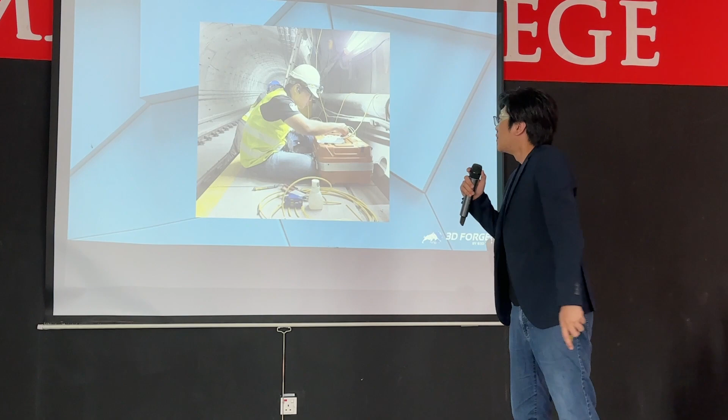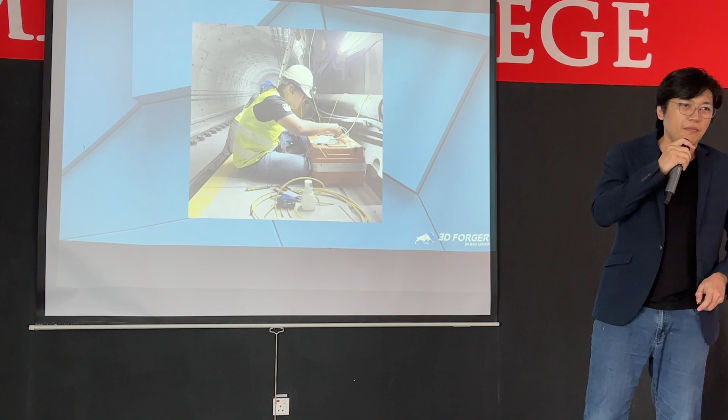So this is me, 10 years ago. I'm a specialist, have a very unique job, work inside a construction site. My job is doing installation of all the sensors to maintain structure health, to make sure the thing is not tilted, not over-vibrated by other construction sites nearby. It's a very unique job, supposed to be very bright in the future. But somehow, in the process of...

Developing the sensor stuff, I realized this is one of the things called Raspberry Pi. Anyone know this? Oh, you know this. So basically, it's an open source thing, a credit card size computer system. You can use it in a lot of places.

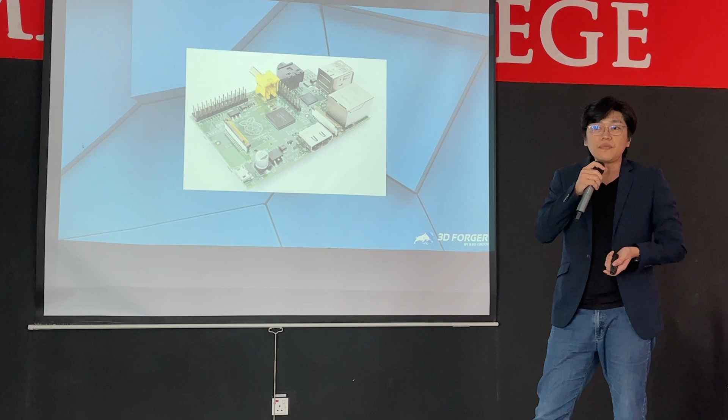One company in Taiwan, at the government level, actually used this inside the earthquake sensors. So they put it everywhere inside Taiwan, and I found this very interesting. They only sell it for $35, and it doesn't come with a case. It's a PCB, no one would think it's a finished product, but it is.

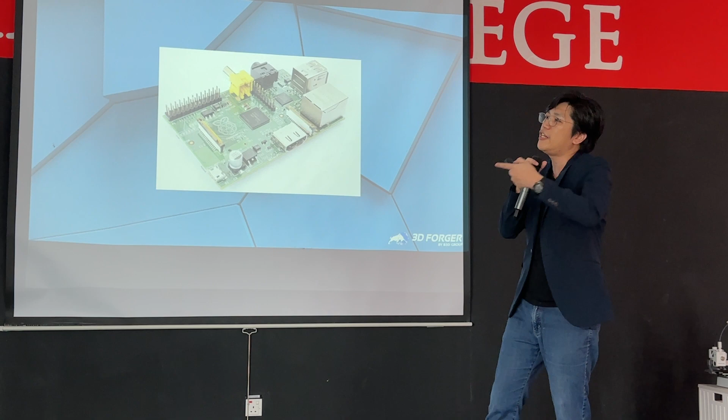So we wanted to convert it to be more finished, so when we use it on site, it's not that awkward. So I thought, okay, how do I make the case? I had a question mark, and I saw a picture like this - exactly the picture that people showed on the internet back 10 years ago. In European countries, they actually used 3D printing already.

So in the forum, someone sent me the digital files. They said, this is the STL file, you can ask any 3D printing service nearby to print it out. I was like, 10 years ago, I never heard about 3D printing - it was the first time I heard of that. So I walked around, searched the internet, and realized our Malaysia is very advanced, but I couldn't find anyone to provide this service to me. That was awesome, because that means I could make a very odd decision by making one myself.

So I decided to make something, a 3D printer, back 10 years ago. Because this thing is actually open source, we can learn it from the internet very easily. So I got this working, roughly spent a month's time after building and calibration to make it work. The story is very long for this building process, it's painful actually.

Because back then, when you DIY make a machine, it's always not working. But at the end, eventually I still made the casing, something like this. It is fun when I see these parts come out, because I've gone through so many failures. The process made me think about one thing, the spark.

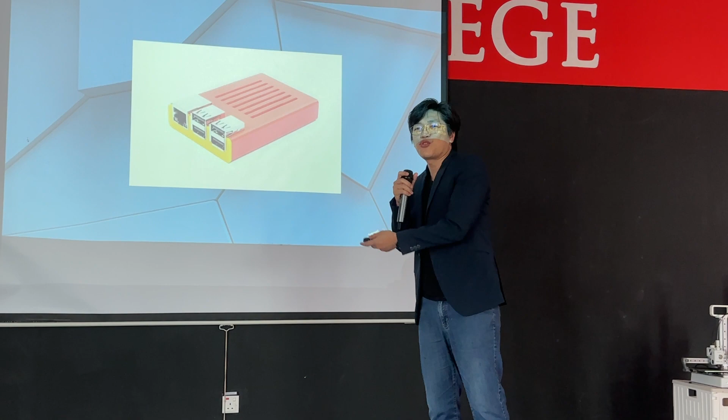For example, your chair you are sitting on, you can't digitalize it because you need to sit on it. You can't change your home sofa to digital. You can't change your water heater to digital. They always have physical products. And 3D printing is one of the ways to build the physical product.

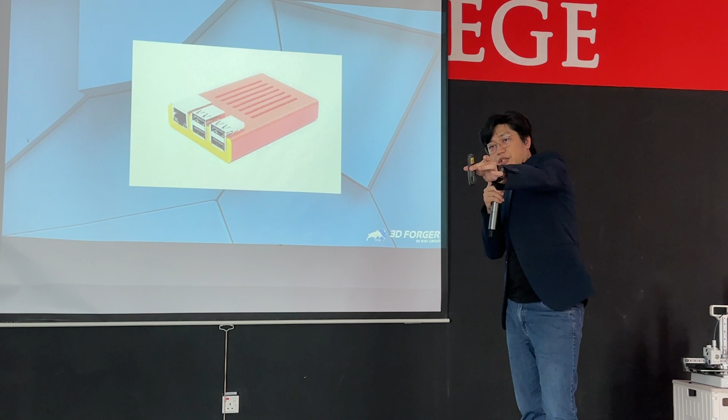That's why I think manufacturing is very complex, to build stuff and make it small, to become the part on your hand, even like this controller. They have definitely gone through the prototyping process, maybe some 3D printing steps that you may not realize, and then mass production - that's one of the ways to build the products.

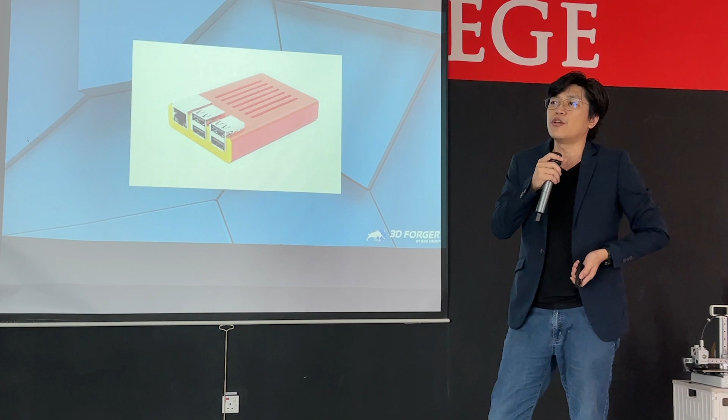So this empowered me as a solo player starting 10 years ago, and it enabled me to build something at home with just digital files. So I tried to understand how it works.

So I built a few more machines, I put stuff on the internet sharing about my process, and I'm very lucky that time - quite a number of people bought machines from me. But unfortunately, it didn't go through like what I was thinking. A lot of people who bought my first generation machine didn't end up using it well.

Because most of them felt like it's too complex to use. It's not like 2D printing, where you go through a few steps, press print and go. But not now - I'll share about the detail later. The market just reflected to me: Bruce, just print for me lah, don't send me all the parts, don't send me the machine, I don't know how to use it.

So finally I went through and started my 3D printing service. This is how it went on. So this is my first machine anyway, the first selling machine. I didn't have a brand at that time, it's called Homemade Delta 3D printer.

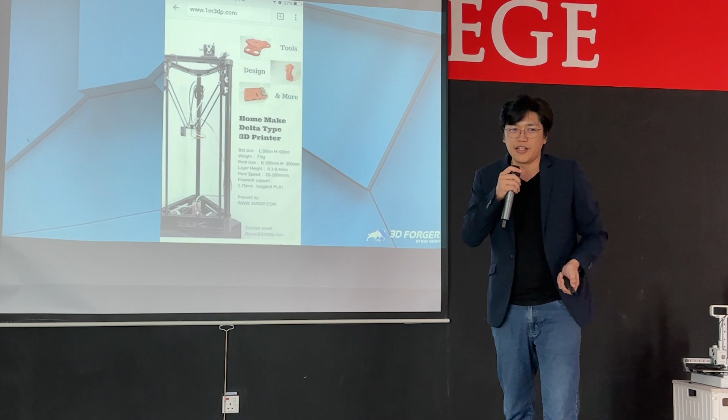Delta is a type of technology, just a little bit of history. Please ignore the website, it's already changed. And this isn't related to any other company, yeah?

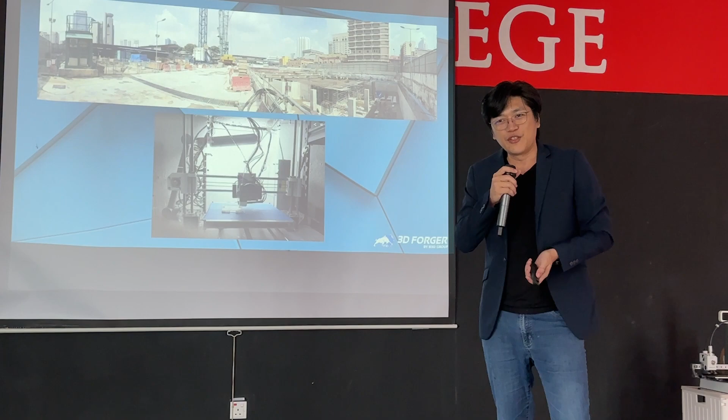So that time, after I changed myself to become a service provider, it's like daytime on the site, nighttime on the machine. Both in sequence, because in daytime I measure the physical, the big size building structure, and at nighttime I measure my machine structure. So it's still fun because it looks like it's doing the same thing but totally different.

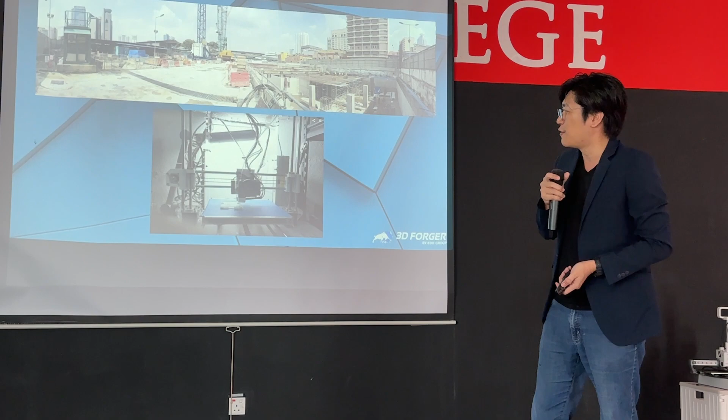And fast forward a few years later, I look back at all the projects I've done. There's casing, brackets, holders, basically all of them prototypes. And then you have tools and etc. All these images, every image I can tell a story.

One of this, like this one is KFC. You know why KFC got me to do some casing? It's not KFC who found me, but actually the payment gateway system found me. They needed to have some branding on it.

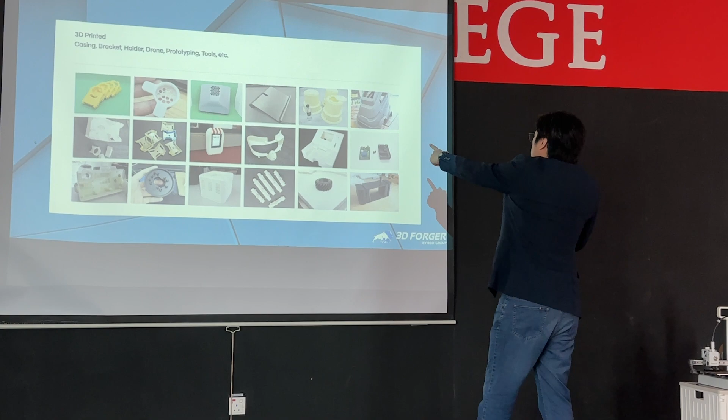Then robots - this robot is actually a very big size robot, 1.8 meters, and we put it in Singapore. They're using this for the case.

Many stuff, and not only engineering stuff, not only casing, we also went into marketing because why not? People just found me to build props, movie props, characters, sculptures, and sometimes a signboard, etc. Some of the images you may have seen before, or some of you may not, but I definitely got one of the pictures you may spot out later.

Other than marketing, we also go into professional markets, architecture, topography structures. This one is somehow linked to my background because I know the structure very well. And a lot more crazy after that, few years later, last 2 years we're going more extra.

We do record-breaking stuff, like football, the World Cup. If you realize, this is the World Cup trophy, but we're talking about 2 meters in base size. It's taller than me, and with the base it's actually 3 meters. We put it in front of Dataran Merdeka. This was actually a special request from the local government.

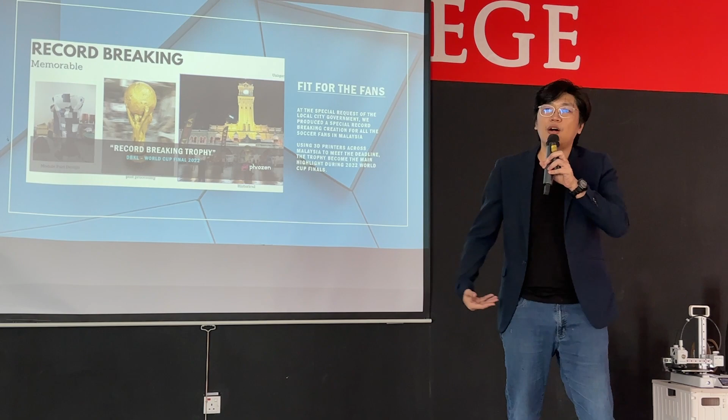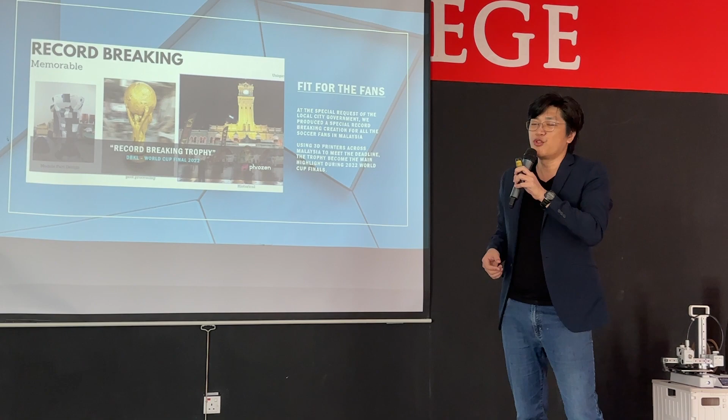We collaborated with 2 different associations. One is our association, called the Malaysia Additive Manufacturing Association, short for MAMA, and the other is the 3D Printing Association. Another one is the Food Truck Association, so they had a food truck event there. We did that for the fans.

Especially for this case, you'll see a lot of Lego stuff, very colorful. Why did that happen? Because in the last 2 years, we already have more than 1,000 hobbyists using 3D printing at home. The idea is, hey guys, how many of you have remaining materials at home? Help me print this part. So fans come together, everyone submits small parts, and at the end we assemble them like Legos, build it up.

This is how it works. Imagine on the spot, if everyone of you has a 3D printer, you can actually do something very big in a very short amount of time. You don't necessarily need a big factory to do it, just everyone contributing a little bit of power. This is what we call community power.

Funny event. We also do some premium surface finishing, not only printing. With printing you'll always see some layers in front, but we can do post-processing to make the surface look like this. This is one of the luxury brand projects from Japan.

Now it's inside TRX. If you walk by and see it, you can probably realize which brand it is, but I won't tell you now. It's combined with surface finishing, polishing, and final chroming of all the surfaces to achieve this look. It's not easy, not every 3D printer can do it, but we did, because we found that just 3D printing alone isn't fun enough.

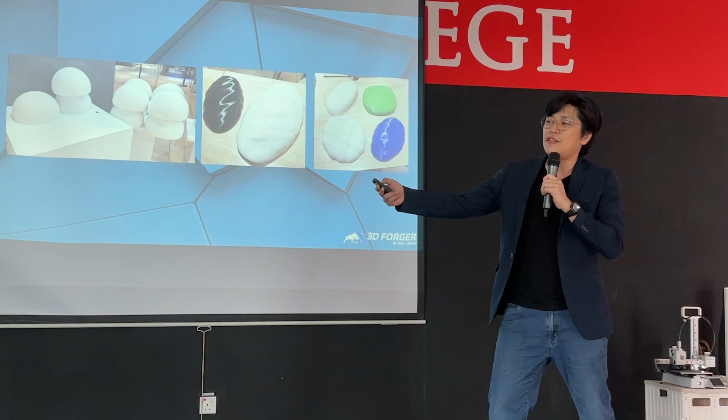Okay, signboard. Guess what it is? Guess what? Yes, you got it. It is 3D printed. We print it part by part, assemble, join them together. So you see from event to temple to maybe daily life, the signboard is already 3D printed.

We've gone through many prototypes. And this, if you see the solid chrome casing on the road or any payment gateway, you know we are involved in the design. All these parts are exactly 3D printed, and we do special coating to make it more lasting on the road. But of course, sometimes the lorry crashes, it still breaks, right? This one no choice. But it happens everywhere.

So because of too many things, I cannot do it myself. So we are founding the association called Additive Manufacturing Association. And additive manufacturing is the term before the marketing term 3D printing came out. It is 3D printing, so you can also call it 3D Printing Association. Otherwise, the name will be too long. And I don't want you to call me Mama as well, it feels odd, right?

So now we are going through a little bit of evolution right now this year. Since last year, we opened a shop inside Sungei Wang. So people can actually walk in, see our machines, see our team, what they're doing, see all the machines running, printing some parts, sometimes big, sometimes small, sometimes you can't even tell what that is.

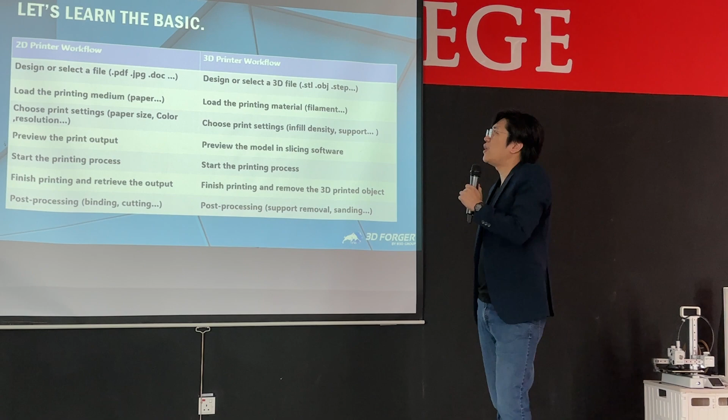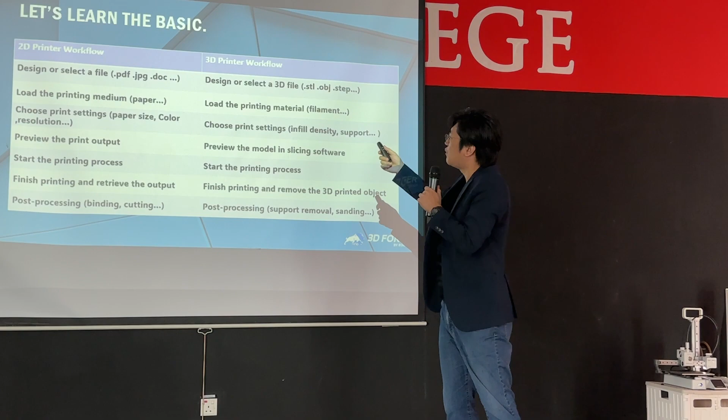I'll give you a quick basic rundown. If you see the 2D printing workflow, you have the design or select a file - whatever you design or select from the internet or wherever. PDF, JPEG, or document. In 3D printing, it's the same thing - you either design or select the 3D files. It's just that the file type is different: it will be STL, OBJ, STP, and others as well if you find them. But this is the basic. How to design and how to select, I'll teach you later.

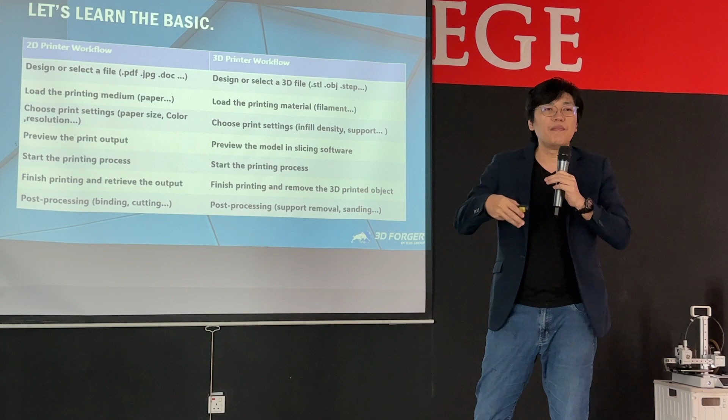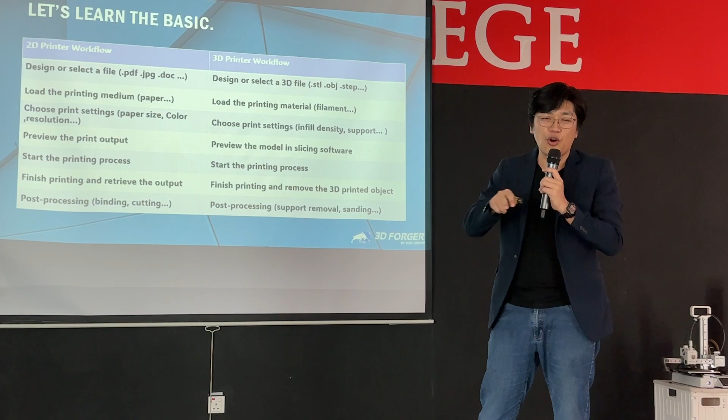Load the filament - the second part is loading the printing medium. In 2D printing it's called paper. In 3D printing, loading the printing materials, you've got many types of technology. The most basic one, in front of me, is filament - basically one roll of plastic. You just feed it into the hot end, and it will automatically run the whole thing. So you load the materials in.

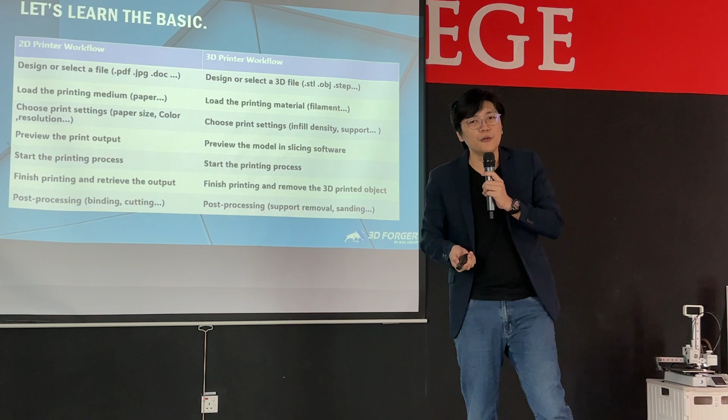That's it. Then, just like you choose the paper setting in 2D printing, you choose a print setting in 3D printing - things like infill density, support. This may be new words to you, but believe me, it's very easy to understand. Infill is the physical box inside, how solid it is. So if you want it full solid, that means 100% infill. If you want it hollow, that means 0% infill. That's it.

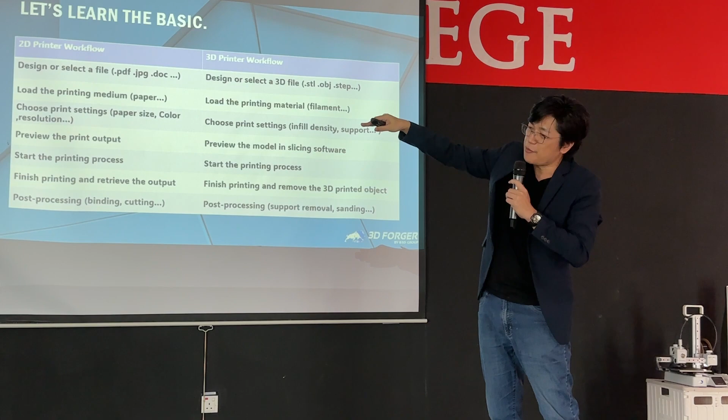Support is needed when you print something out, because we have gravity, you need something to support it. The generation of support is also automatic.

The next thing is to preview the print output, where you check your print before printing to see if the margin is correct or not, like in 2D printing software.

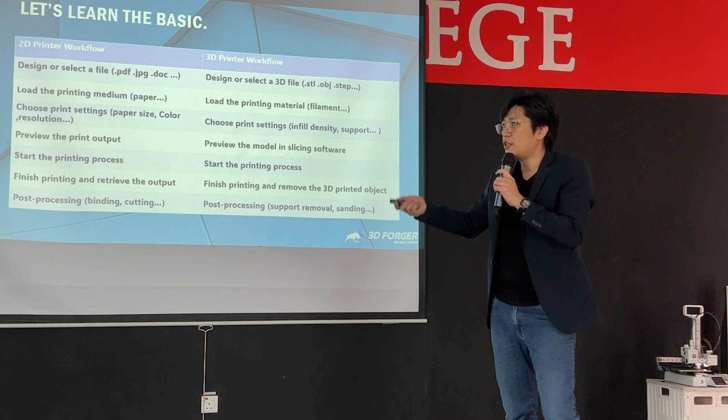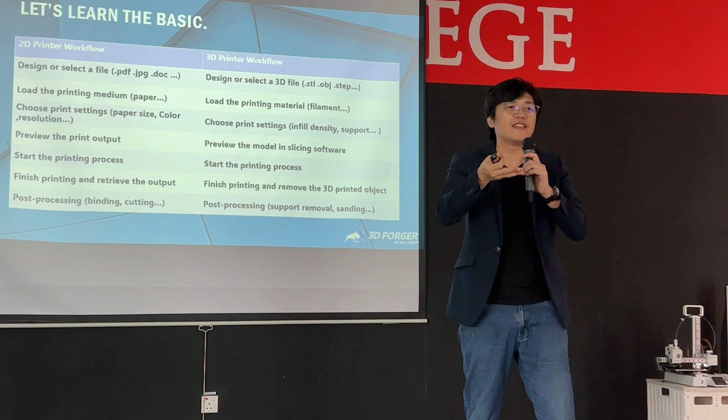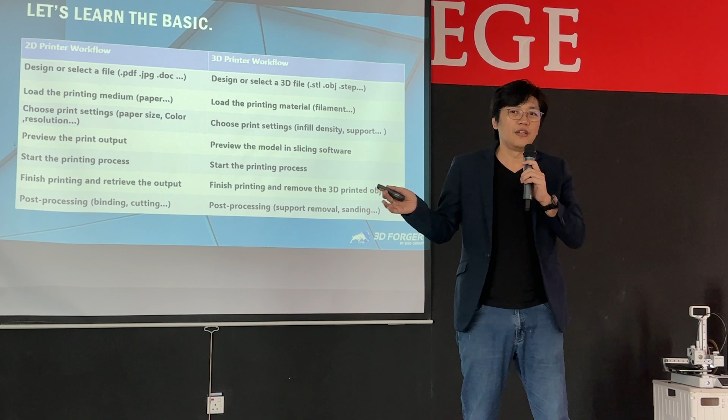In 3D printing, we have software called Slicer. Slicer means you convert the physical 3D model piece by piece, cutting it down, slicing it down, that's why it's called Slicer. But the software now is very simple. You just press a button, press print, and it automatically runs everything. You may change the orientation, that's optional, it's up to your choice.

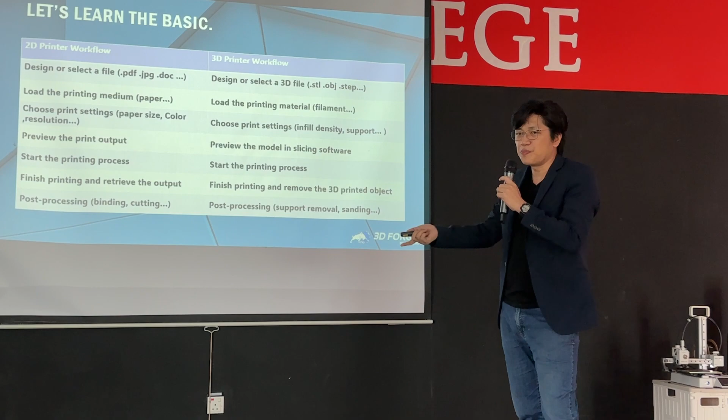So you start the 3D printing. The printing process basically means just press the print button, same thing. Finish printing and retrieve the output - you take it out and see, okay, my print is correct. The 3D printer will flex it out and you take the parts out. It will be a little bit different.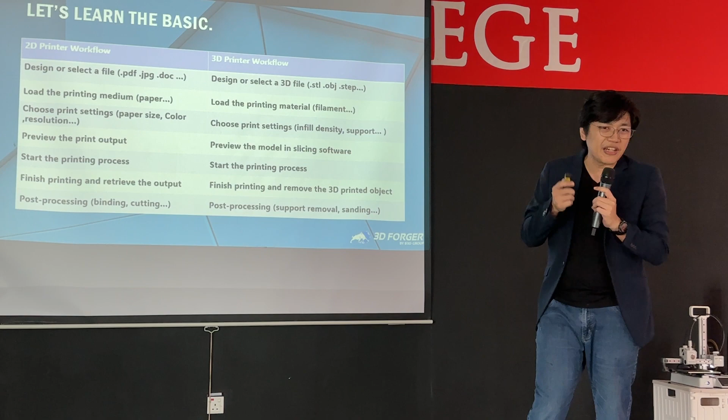And the end is post-processing. In 2D printing, this is talking about binding, cutting the paper if you want, sometimes it's a sticker you print onto. For post-processing on 3D printing, you just remove the part, see any support or anything you need to do, like make it smooth, make it stand, or something.

So we talked a little bit about design. There is a lot of software for doing 3D stuff, but it sounds complex. Anyone know one of these software?

What software do you know? Blender. A lot of people use it in animation, but you can also convert your animation model to a 3D printed model, make it work. All of this software, some of them free, some of them industrial, but it doesn't really matter.

You can always start with Tinkercad. Open the browser, type in Tinkercad, you will log into the website. It's like a Lego system in the computer, you just stack it into 3D, then you can print it out. It's that simple. Others may be a bit more complex, like Blender, which is quite complex to learn.

But you see, even iPad software - this one is Sharp3D and Nomad Sculpt - I use it almost daily because it's easy for me. We can sit in a coffee shop and flip to the 3D model, enjoying life, right?

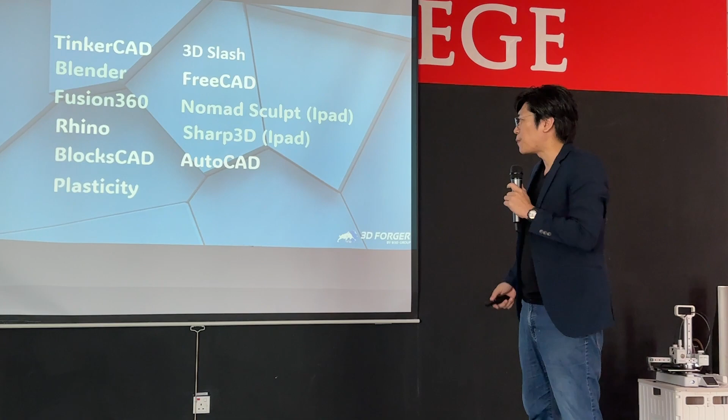Others you may just research up later. So just now we talked about design or selecting the print. If I don't have the 3D model, how do I select?

So this is Thingiverse. Today, if we talk about 3D printing, if you don't know about Thingiverse, it's like you live in 2024 and don't know what Google is. So you must remember this, Thingiverse, yeah?

It is a search engine for 3D printable models, and now already has like 5.6 million models. As of yesterday, it's like 4,809 new models uploaded to the website every single day. It's like a few thousand updates.

So when you think of something collectible or structure or something, maybe someone already created it. You can search for it. Let's do something funny, interesting - is there any Hello Kitty fan? Yeah. So if you search Hello Kitty on Thingiverse, it comes out like this.

Oh, you got 3D files. Basically, you can click in, download it, and just load it to your slicer, and print it out.

And then if you key in lightsaber, you will find that you've actually got 7,261 models there. You can choose to download. This is for when you don't know how to design.

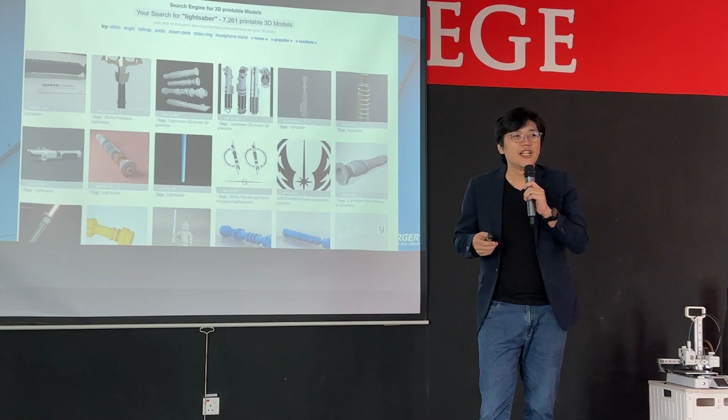We suggest everyone start just by printing something first, because after printing a few more times, you understand how people design things and make them print. Then when you start to learn design, it's actually a lot easier.

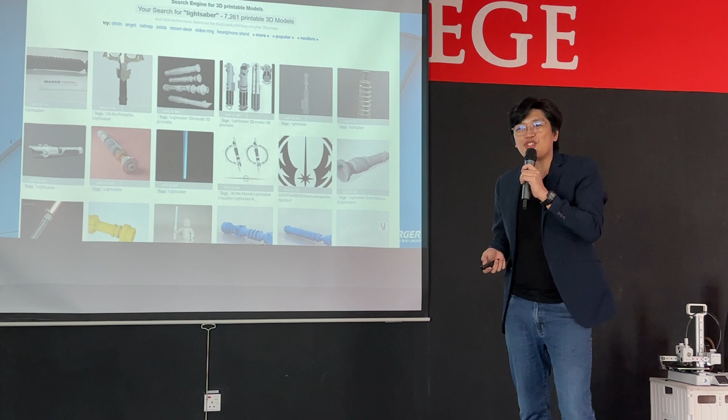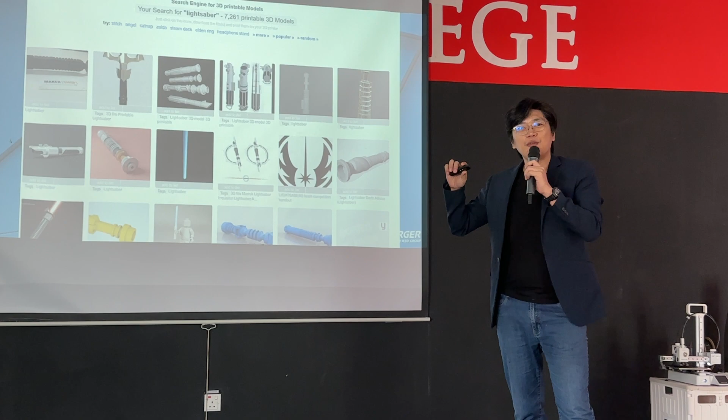This is also where I started. I built the machine without knowing how to 3D model. I built the machine and helped people with a printing service, until a certain point I stopped because a lot of customers were asking, I want this one, but I don't have a 3D model. Then we started to learn. I started to learn 3D modeling like 6 years ago.

Everyone loves AI, right? It used to be boring because I didn't know how to make things, but now AI can generate 3D models for you. Of course it's not perfect now, but you never know how fast AI evolves - maybe in a few months or even days it could improve a lot. You can use whatever AI tools you know.

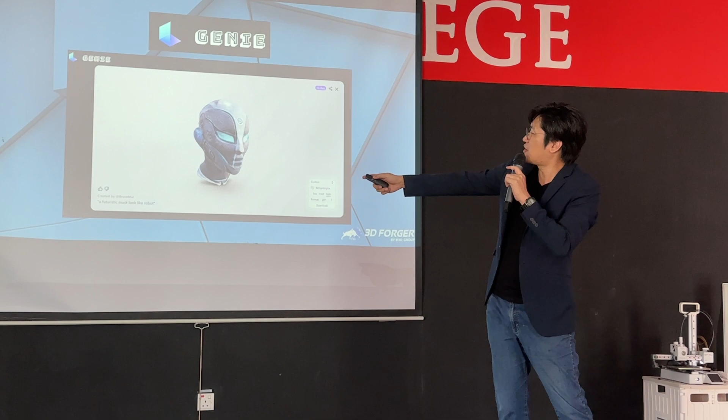This is one of the tools called Genie. You can just type, for example, a futuristic mask that looks like a robot, and it generates a head like this as a 3D model which I can download. Or you can use Midjourney to generate an image concept, then ask a designer to do the 3D. Or you become the designer yourself, helping people do the 3D as well.

Now here I will share a short video showing how to play with this.